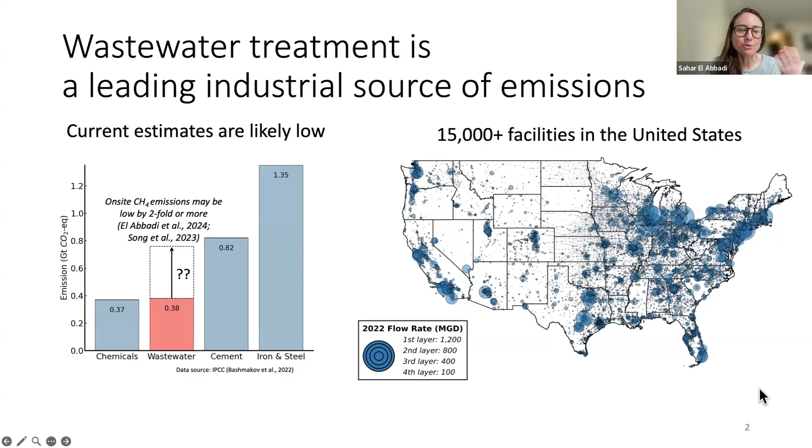There are over 15,000 wastewater treatment plants across the United States, and they really range in size and treatment method. In this map, the size of the dot represents the flow rate, and there's a wide range in terms of how much waste they're treating. It's said within the wastewater industry that really, each wastewater treatment plant is unique. You have no two facilities that are the same.

To underscore this point, I want to highlight a few plants. I decided to focus on California plants here, just to give you a sense of the different types of facilities we can see. This is San Francisco's Oceanside plant, which treats about 20% of San Francisco's wastewater.

It's designed to typically treat 15 million gallons per day, but that can increase dramatically to 175 million gallons per day for storm events, because San Francisco has a combined sewer system. So it's really affected when there are heavy rain events.

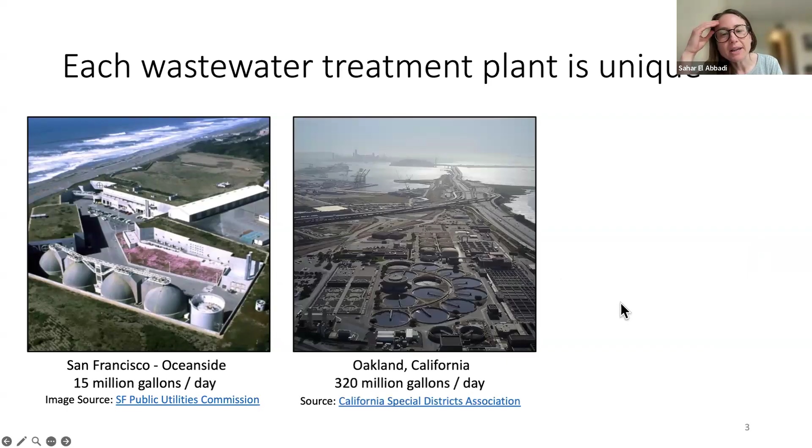Also in the Bay Area, this is East Bay MUD's facility in Oakland, California. This is one of the largest wastewater treatment plants in the United States. It treats 320 million gallons per day.

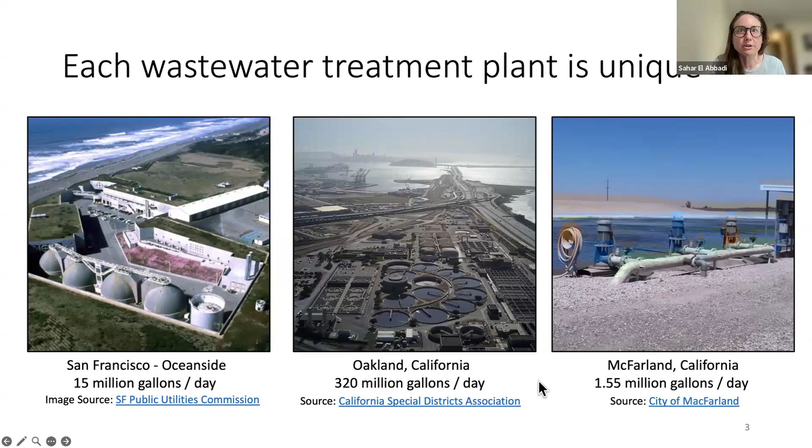These two facilities, even though they represent different treatment approaches, you can visually see the difference between them from these aerial shots. They are quite different from what is actually one of the most common by number treatment approaches in the United States, which is a treatment lagoon. Here's a small facility in McFarland, California, where the waste is added to the lagoon, and this is largely natural processes that are used for treatment - very different from these bigger industrial urban facilities.

So mitigating emissions from wastewater treatment is a challenge, in addition to the variability you see across the different facilities. There are a couple other factors to consider: wastewater treatment produces multiple greenhouse gases, so I'll mostly be focusing on methane today, but we also see emissions of nitrous oxide as well as carbon dioxide, which is relevant because some of that is of fossil origin.

Emissions come from both point sources as well as large areas, which poses an additional challenge. And a lot of these are biologically mediated processes, which means we see inherent variability across different treatment configurations that are designed for different biological treatment processes, and we have different microbial communities that contribute to the emissions.

But I think wastewater treatment is also a promising starting point for thinking about reducing emissions, and what we learn from wastewater treatment really can translate to other sectors.

Compared to other emission sources, for example agriculture—we had a meta talk several weeks ago about livestock emissions—in contrast, wastewater treatment really is a more highly controlled and engineered system.

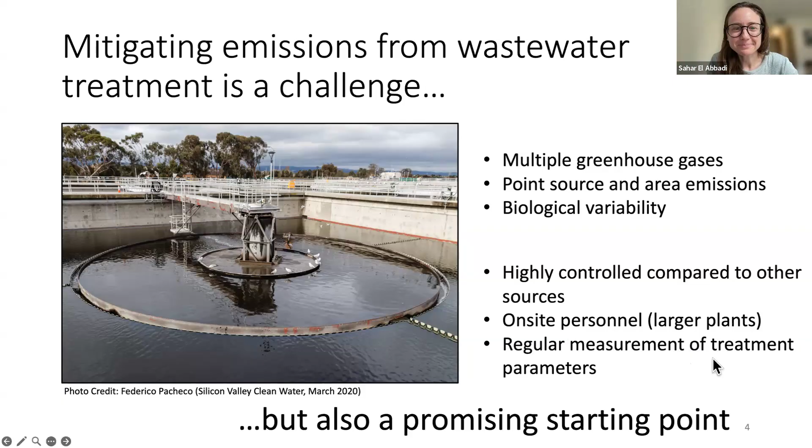For today's talk, I'll start with an overview of methane production at wastewater treatment. Then I'm going to discuss the modeling work that I've done at LBL, looking at our estimate for nationwide emissions from this sector, and end with thinking about how we can use some of the new technologies for measuring methane in the wastewater sector. That's bringing in some of the previous work I did at Stanford with controlled releases, which the meta audience may be largely familiar with—so thinking about how we can apply that to this sector.

So to begin with methane production from the wastewater treatment sector: the greenhouse gases in wastewater treatment are largely biologically produced for the most part, and we are concerned both with methane as well as with nitrous oxide.

I don't expect you to internalize all the details of this slide, but on the left half we have a simplified version of how methane is produced in wastewater treatment. We are breaking down complex organics in order to stabilize them, so that they aren't polluting our water bodies where we discharge the waste. This process involves first breaking complex organics into simpler organic compounds—organic acids—and then these are in turn transformed into methane. This process is methanogenesis, and it happens when you have a lack of oxygen—these are anaerobic processes.

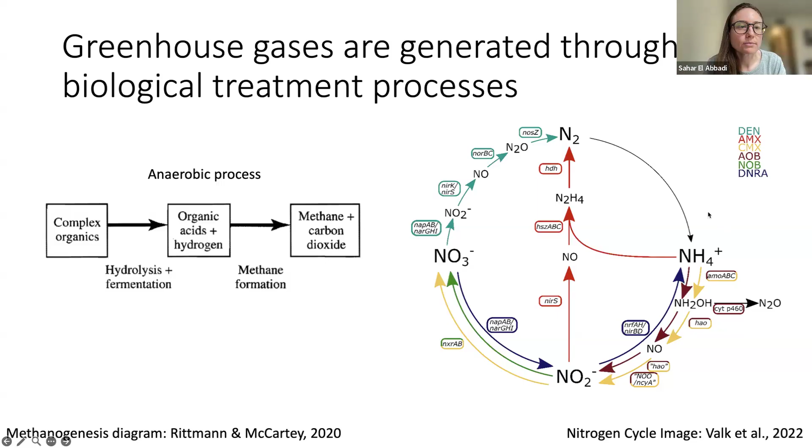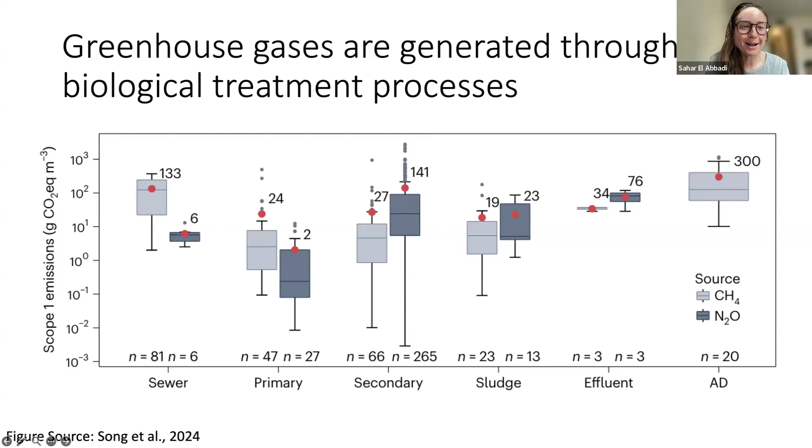So I'll walk you through in more detail what this looks like. We can see methane production from sewer systems—the lighter gray bars are methane, and the darker ones are nitrous oxide. As we're transporting waste to the treatment plant, you can have settling and solids accumulating in the pipe, and this can result in methanogenesis, producing methane, which can either diffuse upward from the sewer system, or remain in the aqueous phase and be produced in the sewer system but released at the treatment plant itself.

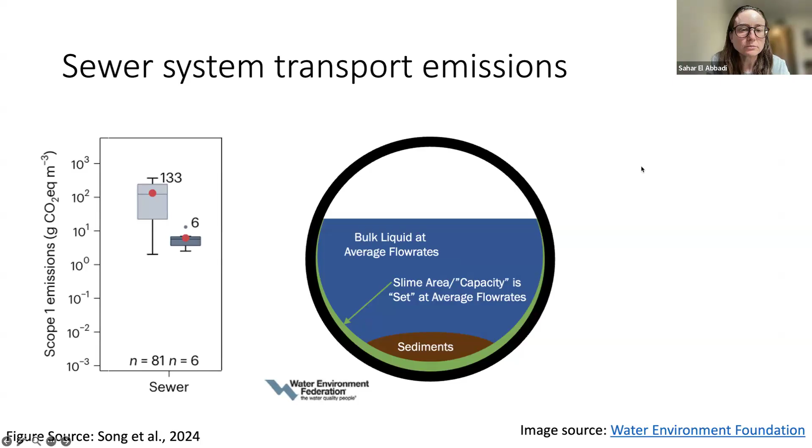The first step you'll typically see in a wastewater treatment plant is primary treatment. The goal here is to remove large solids from the water through gravity settling. This process collects solids to send to solids treatment, which can then produce methane.

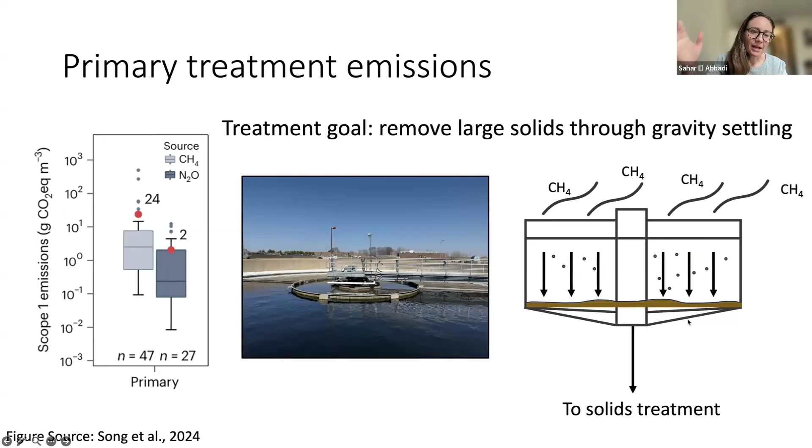Next, the liquid that has gone through primary treatment goes to secondary treatment, where the goal is to remove dissolved organics. We previously removed particles, now we're removing the aqueous phase dissolved organic compounds. This is achieved through the conventional approach of pumping air and mixing the wastewater to accelerate biological processes that would happen anyway if you discharged waste directly into a river or stream—having those same biological processes occur in a controlled environment.

This system is traditionally designed for removing organics, but can also be designed to remove nutrients, nitrogen and phosphorus, often involving a combination of both aeration and non-aeration.

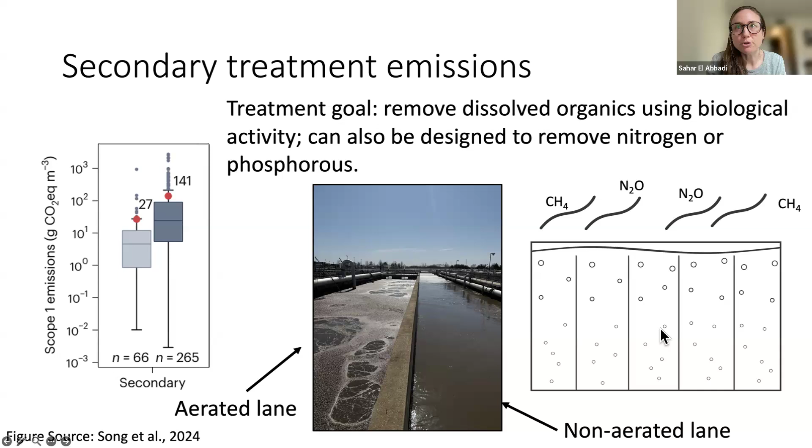After secondary treatment, the next thing to consider is solids treatment—what's happening to the solids removed both through settling and in the secondary treatment process. Here the goal is to stabilize the solids and allow them to be safely disposed of.

Many people in the methane world are very familiar with anaerobic digestion, where you see a huge amount of methane being produced. Based on our current understanding, this makes sense—we're seeing very high methane emissions from facilities with anaerobic digesters, that's the 300 grams of CO2 per meter cubed treated.

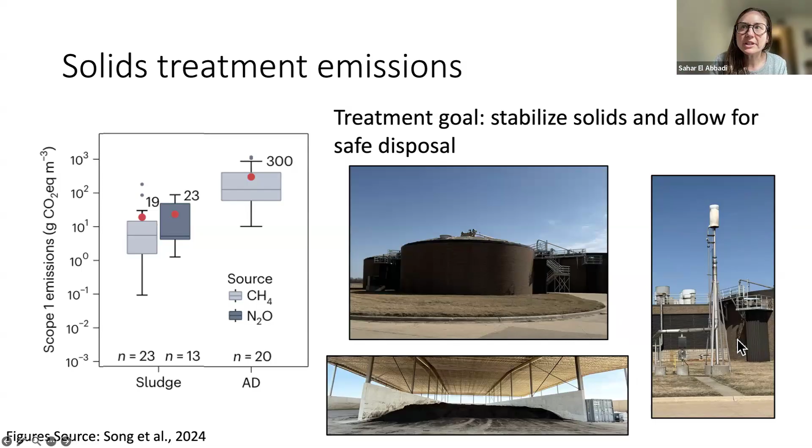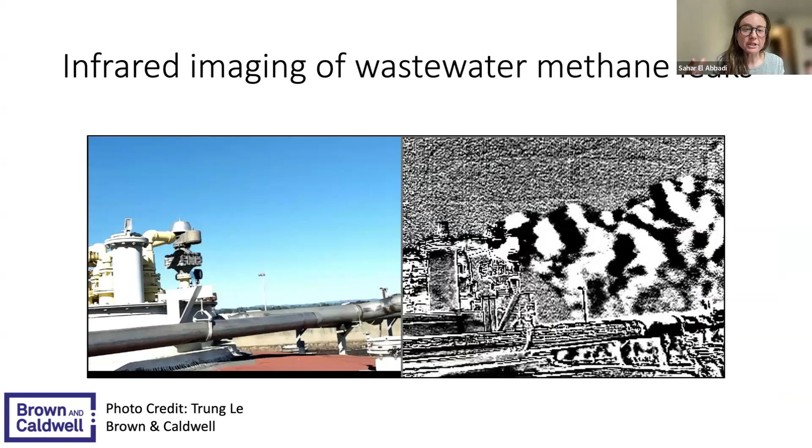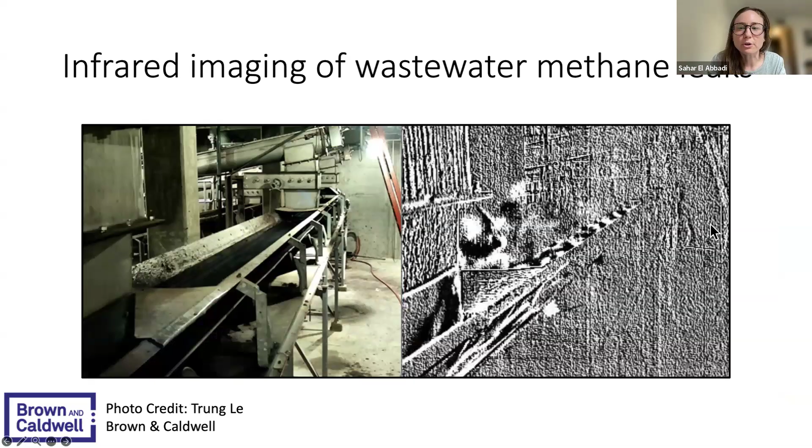So to take a step back, we have several different treatment processes throughout wastewater treatment, and we're seeing different greenhouse gases produced at different stages. But we need to consider many different aspects of this highly complex system when thinking about reducing the climate impact of wastewater treatment.

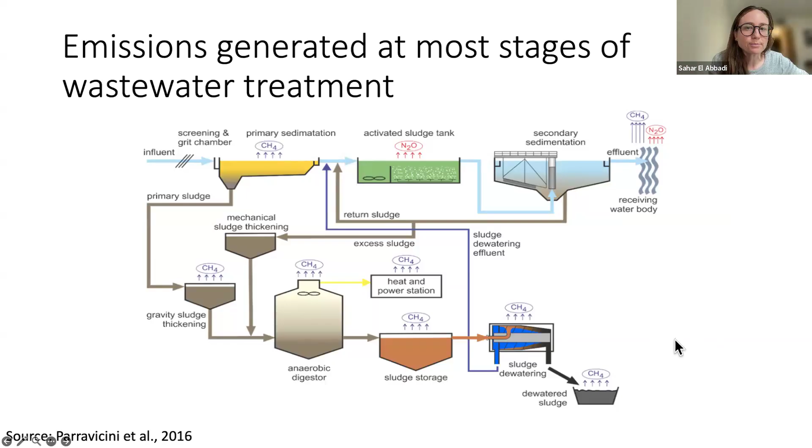With that overview, this brings me to the next main portion of my talk, where I'll discuss work I did at LBL, looking at benchmarking and creating an inventory of greenhouse gas emissions from the wastewater treatment sector. This was work I did closely with PhD student Jianan Feng, who is at University of Illinois Urbana-Champaign.

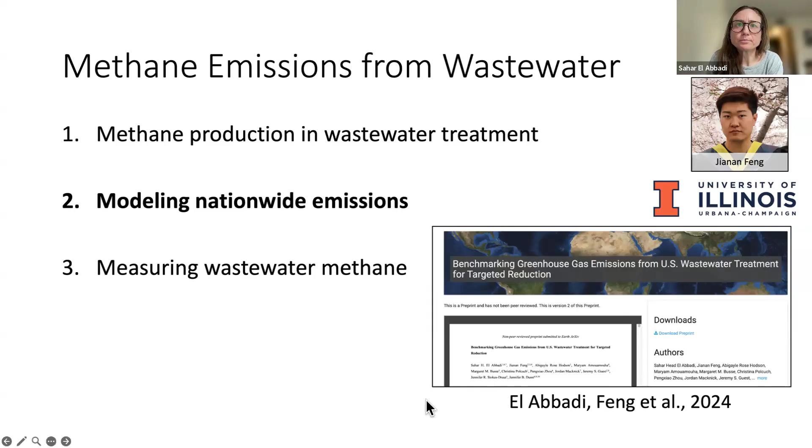So in order to answer the question, what is the climate impact of the wastewater treatment sector, we generated an inventory of all of the facilities across the United States. This is 15,876 different facilities, and for each facility we compiled and developed a model for the treatment train configuration.

What are the processes involved in treatment? How much biogas is being produced, how much solids are being produced, and how are the solids being disposed of. We calculated emissions for each facility using emissions factors specific to the treatment processes present, and we included not just emissions from on-site biological treatment, but also upstream energy and chemical consumption, as well as downstream emissions. So what are the emissions when you dispose of your solids offsite?

Those applications typically are either for agriculture, using solids as a soil amendment, or disposing of them in a landfill.

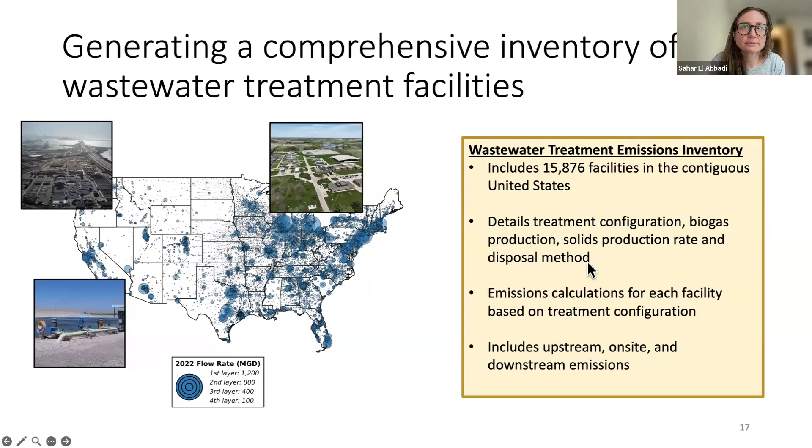If anyone is interested in working with some of these databases, happy to talk through that, because working with them and understanding them is kind of non-trivial.

So we compiled data sets on what infrastructure exists in the United States, and also used literature values to have emissions factors for different configurations, and ultimately compiled a final greenhouse gas emissions inventory.

Since I spent the first portion of this talk walking you through the different treatment processes, I'll go into a little more detail on how we assigned treatment configurations for each of the 15,000 facilities in our database.

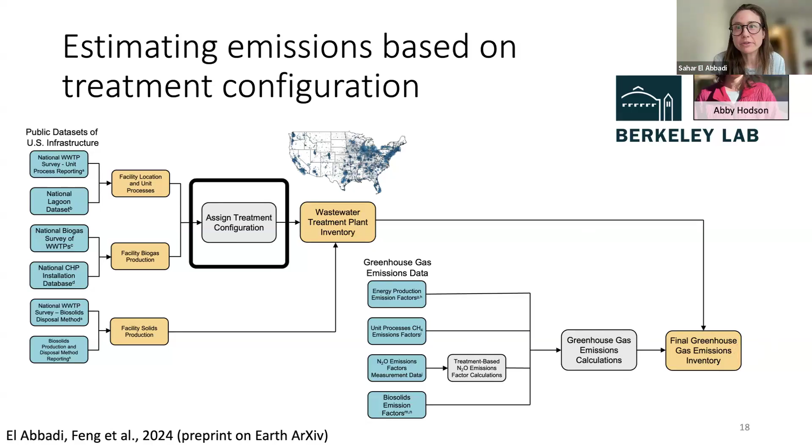In terms of liquid treatment, we could have the primary clarifier, so do we have primary treatment, that first settling process I talked you through earlier. And then we coupled this with some sort of main biological reactor for secondary treatment. For those of you more into the details of wastewater treatment, we considered conventional activated sludge systems, as well as aerating with pure oxygen.

And then we considered different biosystems designed for nutrient removal, so removing nitrogen and phosphorus. We also included a trickling filter configuration, which I didn't talk about earlier, but it's basically running the wastewater through a fixed bed that has biological attached growth on the filter.

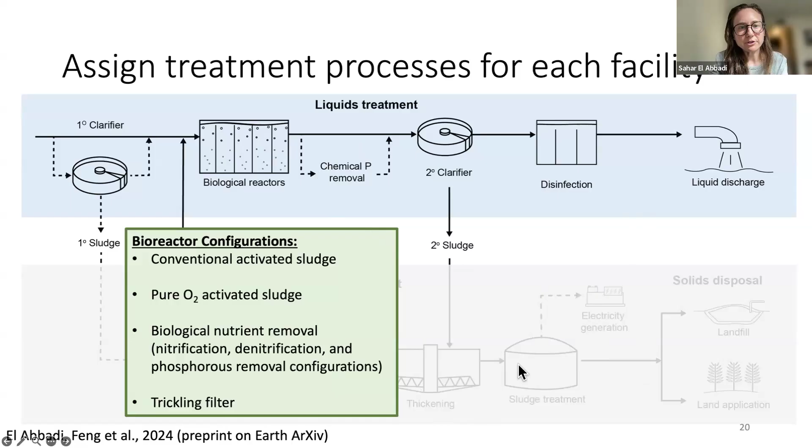We also included the option for chemical phosphorus removal, and included final stages of disinfection before discharge. So for each facility, we had different treatment objectives — the plant could have been designed to remove organics, as well as different nutrient removal configurations.

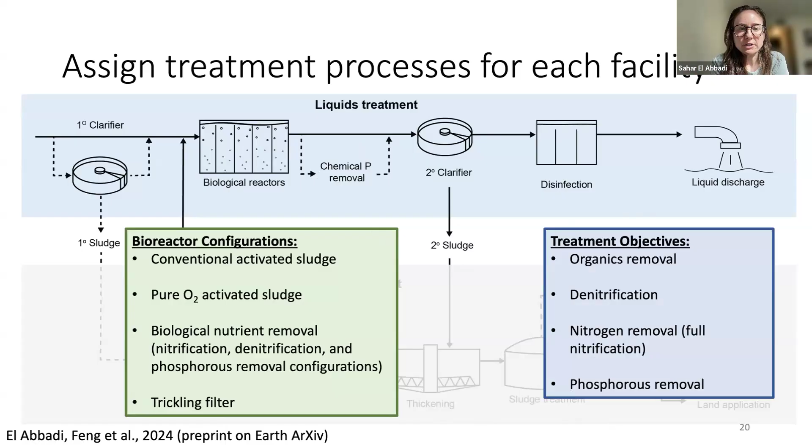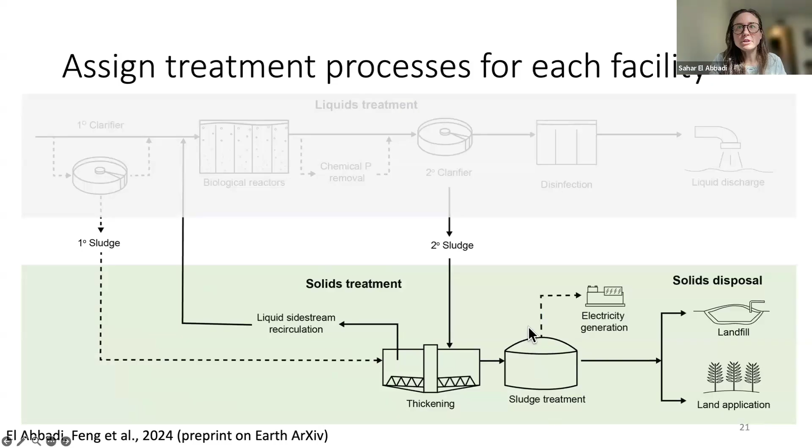On the solid side of treatment, basically the main thing we toggled was how we're stabilizing our solids. Here we considered different scenarios for anaerobic digestion as well as aerobic digestion, multiple approaches for incineration, as well as lime stabilization.

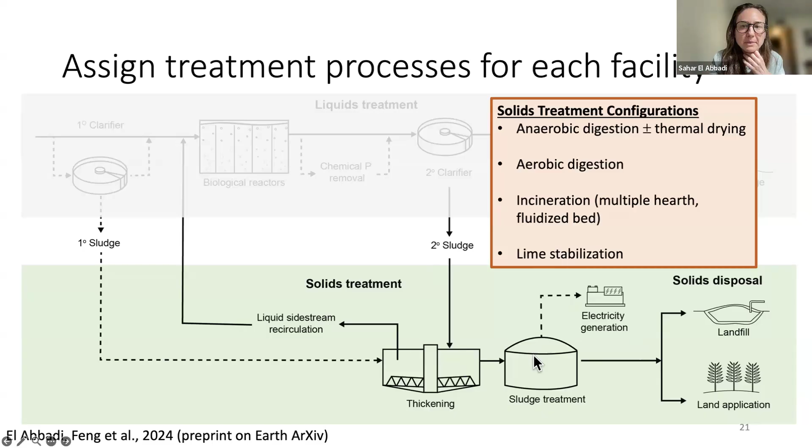Then we considered two different ways facilities could dispose of our solids — they either sent it to a landfill or applied it to agriculture. So for every one of the facilities that we had, we applied a configuration based on this schematic, and we ultimately had 49 different possible configurations.

Basic activated sludge, where we have that secondary treatment that we're pumping with air, accounts for about 30% of the facilities in the United States, treating also about 30% of the total annual flow in the US.

Interestingly, we found there were 8,000 wastewater treatment plants in the US that use lagoons as some form of treatment. On the solid side, about 30% of facilities used aerobic digestion, and a smaller number, about 20%, used anaerobic digestion. But the facilities that used anaerobic digestion treated about 64% of total flow. So we're seeing a smaller number of anaerobic digesters, but they tend to be much larger facilities, which is meaningful for our methane emissions.

Also, while about 20% of facilities in the US use anaerobic digestion, only 321 of them recover energy from the biogas they produce. So that means a lot of facilities are flaring their gas.

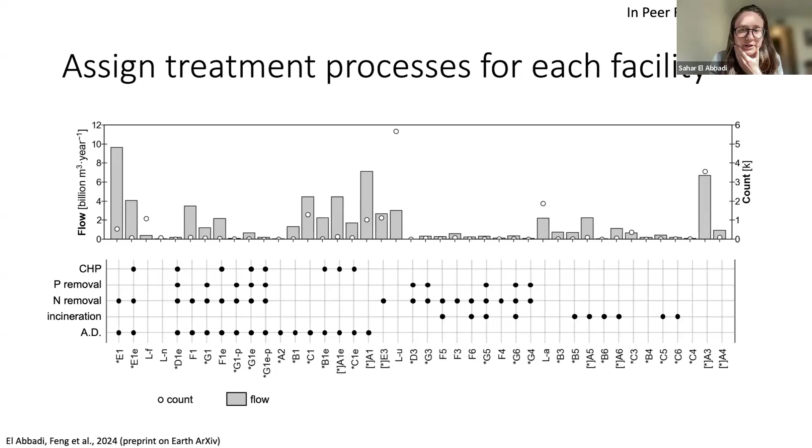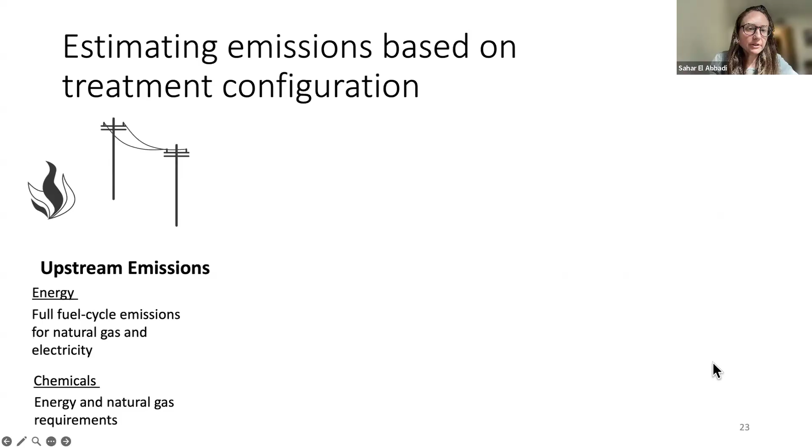In terms of estimating the total emissions from each of those configurations that we assigned to our treatment plants, we considered upstream emissions — this was the energy requirements for the plant. We applied process models for each of those configurations to get an energy estimate, and then calculated the climate impact based on the grid serving the plant, the state grid.

We considered chemical inputs. In terms of on-site production, we considered methane produced both in anaerobic digesters and from lagoons that were anaerobic or facultative, meaning a mix of anaerobic and aerobic. We included carbon dioxide, assuming a fraction of the incoming carbon to the plant is of fossil origin. We also considered nitrous oxide emissions based on the different nutrient removal configurations — whether the plant was designed to transform ammonia fully to nitrogen gas or to nitrate, or if it was not designed to remove nitrogen at all.

In terms of downstream emissions, if the biosolids were sent to a landfill, we accounted for methane produced at the landfill. And if sent to agriculture to be applied to agricultural soils, we accounted for nitrous oxide emissions from that process.

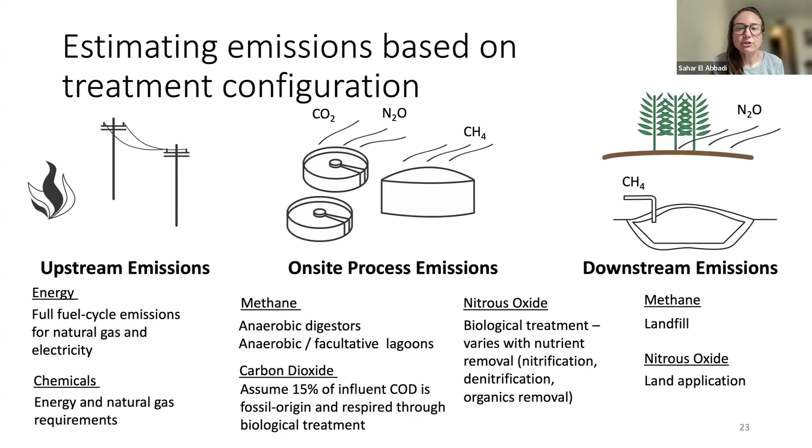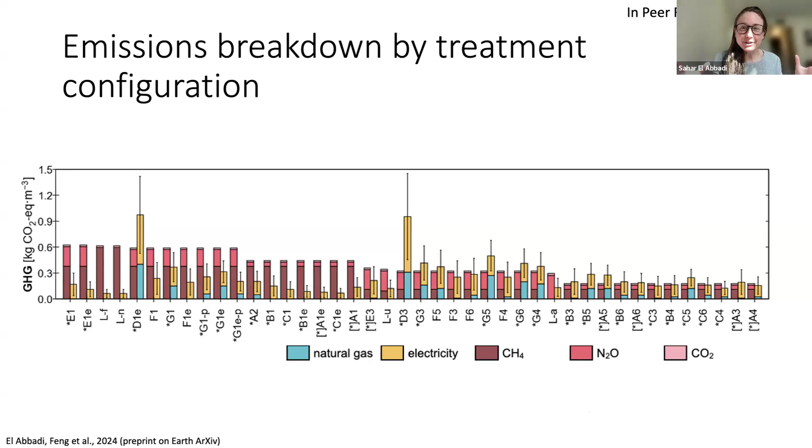Once we had the estimates for emissions from every single facility, we could calculate the nationwide impact. We found our estimate of nationwide greenhouse gas emissions is 27% higher than EPA's current estimate. There were a couple of reasons behind this: we found methane emissions were on the whole higher than EPA's estimate, and we also included electricity, which EPA did not.

Again, our on-site biological treatment processes — methane and nitrous oxide — are the main contributors to the overall nationwide climate impact of wastewater treatment. Electricity used to power the processes on the plant is also about a quarter of the total climate impact, and a smaller portion is associated with downstream emissions.

Looking at our overall facilities across the country, perhaps unsurprisingly, we found that most of the emissions are coming from the very large facilities — 80% of emissions are coming from 8% of facilities.

To look a little more closely at methane emissions — again that was about 45% of the climate impact of wastewater treatment, so really an important contributor. 85% of that methane was emitted from facilities with anaerobic digesters. We accounted for the methane produced at facilities without anaerobic digesters too, but really anaerobic digesters are the heavy lifters here in terms of contributing to methane leaks.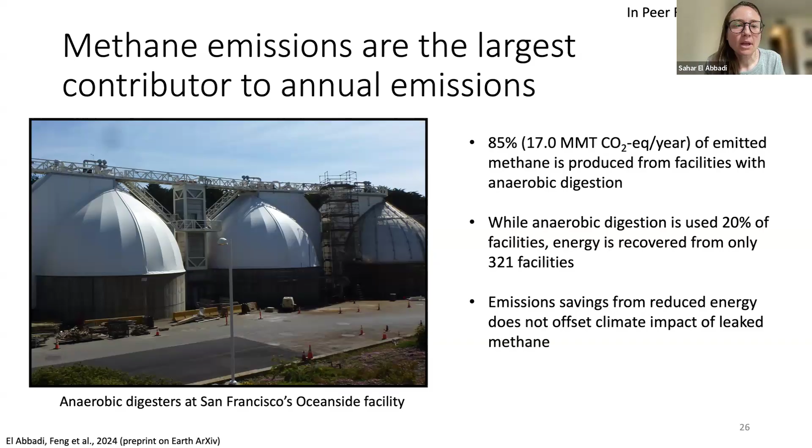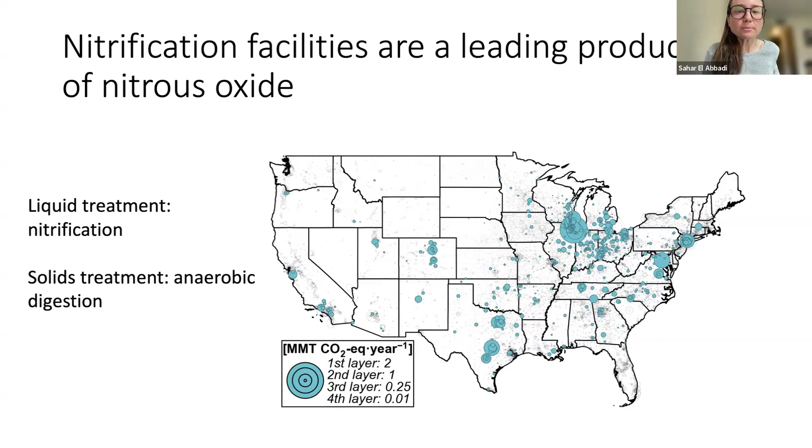Our most climate intensive treatment configuration was when we had the combination of nitrifying treatment with anaerobic digestion. For our liquids treatment, we were transforming ammonia to nitrate, which resulted in a lot of nitrous oxide production, and coupling that with anaerobic digestion for methane, we're seeing the double hit from both of those greenhouse gases.

Finally, I want to emphasize that wastewater treatment lagoons were the most common treatment method across the country. As I said before, we saw about 8,000 wastewater treatment plants that use lagoons as their method of treatment, and these are incredibly understudied. We ended up having to rely on IPCC's emissions factors for lagoons, and there really isn't a lot of data currently available. So while these treat a smaller percentage of flow and don't contribute as much to emissions as larger facilities do, they tend to be less controlled environments.

You may have a facility dumping their waste into a lagoon and leaving it sitting, not properly mixed, so you could see perhaps a lot of methane being produced in that way. I think this is really an area not to be overlooked, but it also underscores the broader point that we're limited in this analysis by the availability of measurements.

We really need measurement data that reflects the broad configuration of wastewater treatment plants we have, both in terms of variability in geography, treatment process, and size. So I think we really need to consider how we can improve measurements, both to have better estimates of nationwide emissions, but also to find and fix leaks and reduce emissions overall.

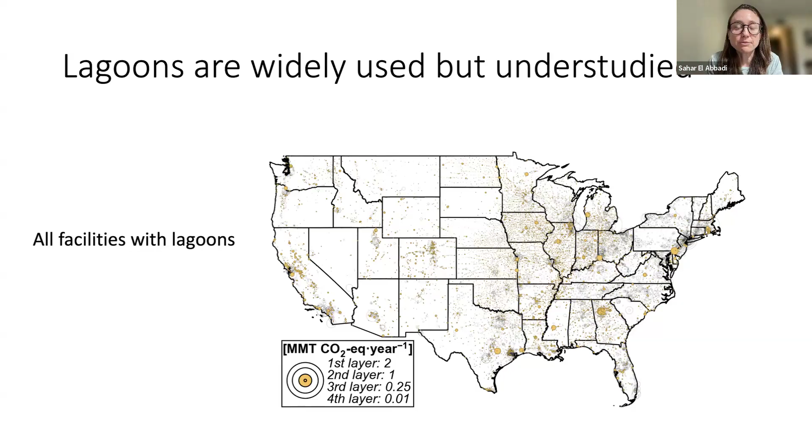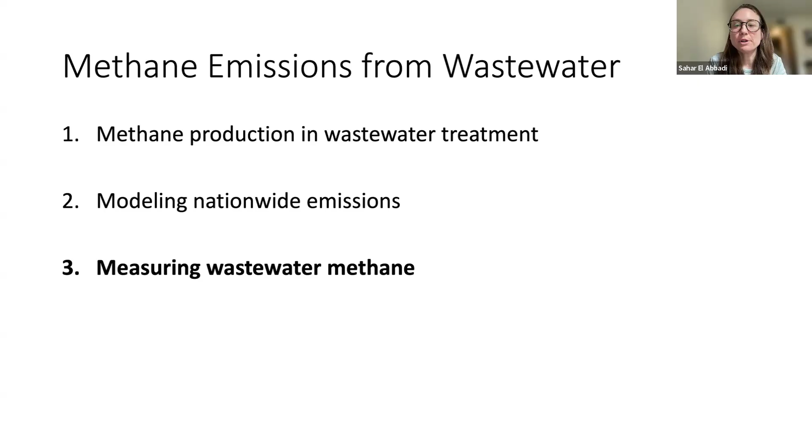This brings me to thinking about how we might want to apply some of the new measurement technologies that are now being used increasingly in the oil and gas space. How relevant are these to the wastewater treatment sector?

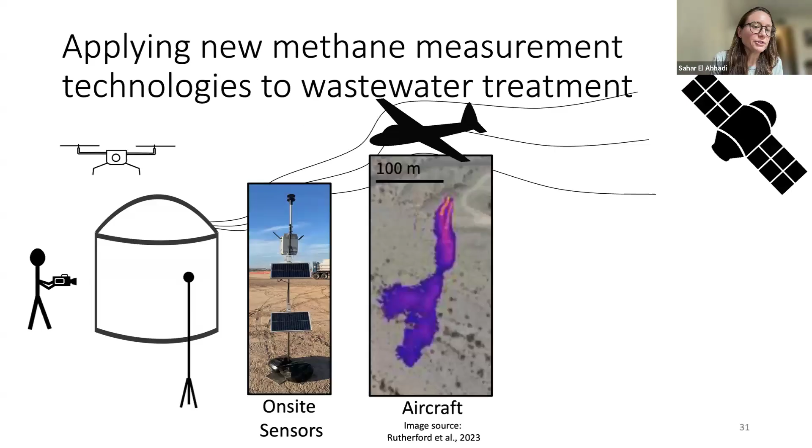This maybe is a bit more familiar territory for a lot of the meta audience, and we're coming back to the work that I did at Stanford. We can think about how we might deploy different new technologies, such as on-site ground sensors, or conducting aerial surveys and satellites, in order to better understand emissions from wastewater treatment.

I think all the advantages you see in the oil and gas sector that these technologies provide really do translate to wastewater treatment, as they would allow us to have a better snapshot of how emissions vary both across facilities, if you conduct an aerial survey of a large geographic area, or if we can have a better understanding of how emissions are changing over time.

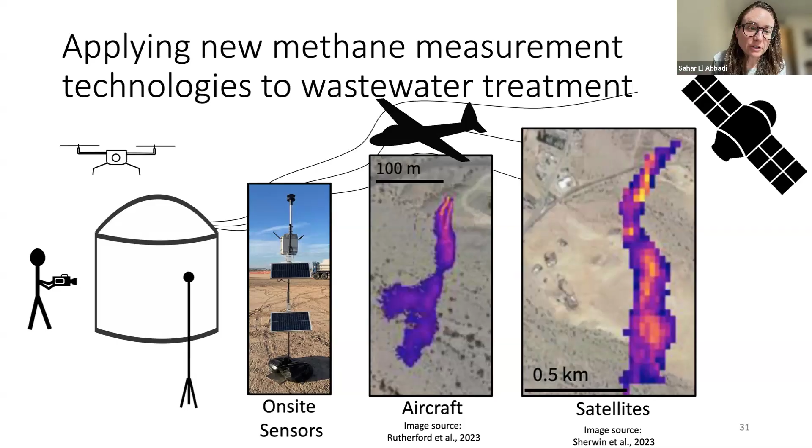Flashback to remember our Stanford controlled release tests, for regular meta attendees. This is something I think you've seen many times before. Richard, Evan, and I have all presented our work conducting independent validation of airplanes, satellites, and ground sensors. But for those less familiar, just a brief highlight in terms of the quantification capabilities of these technologies.

Satellites aren't going to be able to see methane emissions through the atmospheric column the way airplanes can, so they won't see as small emissions. But on the whole, we're seeing strong trends in the right direction, with accurate measurements in aggregate across satellites. The work Richard and I did evaluating ground sensors is an area where we really need growth in terms of performance and R&D to improve quantification, since currently we're seeing strong underestimates.

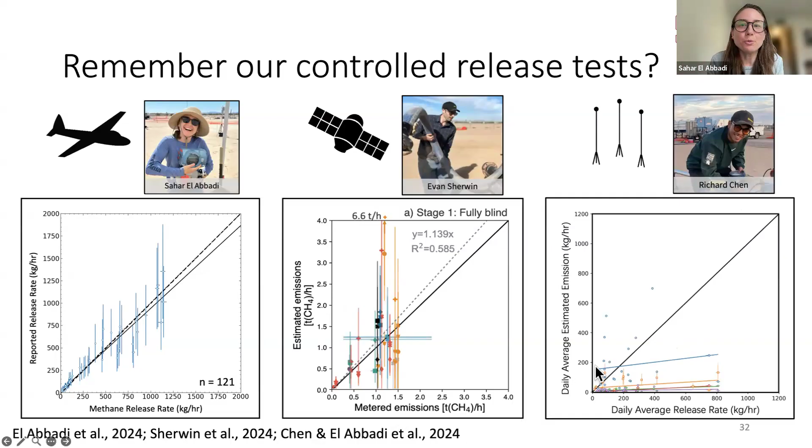So will these technologies be able to see emissions from wastewater treatment? This is work from Carbon Mapper, where they took images collected with their aircraft platform and attempted to predict if their satellite would be able to see emissions. In this paper by Ayasse et al. 2019, their airplane was able to see emissions from a wastewater treatment plant, actually a treatment plant in San Jose. They also saw emissions from manure lagoons and dairy digesters, which were larger - about twice the size of the wastewater treatment plant leak they saw.

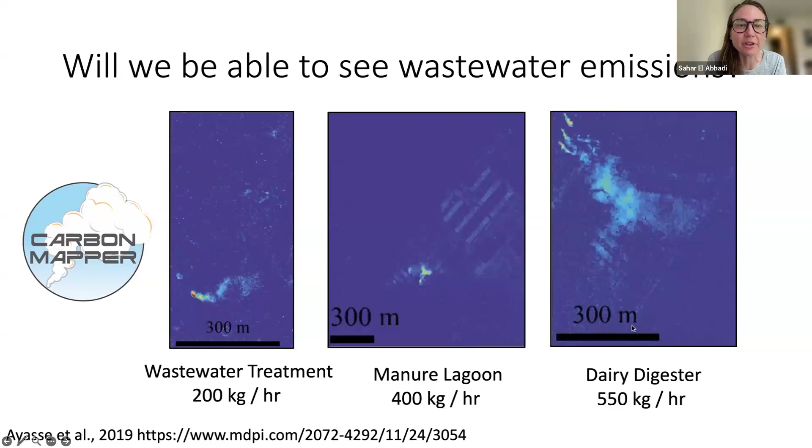While these are from the agricultural sector, lagoons and dairy digesters are the same technologies we're going to see at wastewater treatment plants. So we are seeing emissions using these existing platforms from wastewater treatment or similar systems. I've actually been to workshops where we looked through the Carbon Mapper platform and were able to find, for a specific wastewater treatment plant, the leaks coming from it, which was quite cool.

Depending on the instrument, whether airplane or satellite, we may be able to see moderate to large wastewater treatment plant emissions. It would be much more challenging with satellites, but perhaps with more targeted ones. Ground sensors seem like a natural fit for the wastewater treatment sector - we're already monitoring a lot of parameters on site, and deploying sensors around equipment seems ideal, but unfortunately we're not really at the stage where these technologies are ready to be used.

The performance we found for ground sensors was on a really clean background, and wastewater treatment is a much more complicated environment where there's going to be different infrastructure and buildings that obstruct plume development, affecting how ground sensors estimate the ultimate emission size. We've done controlled release testing on this very clean background so far, and it would be really valuable to have additional technology validation that mimics wastewater treatment plant emissions.

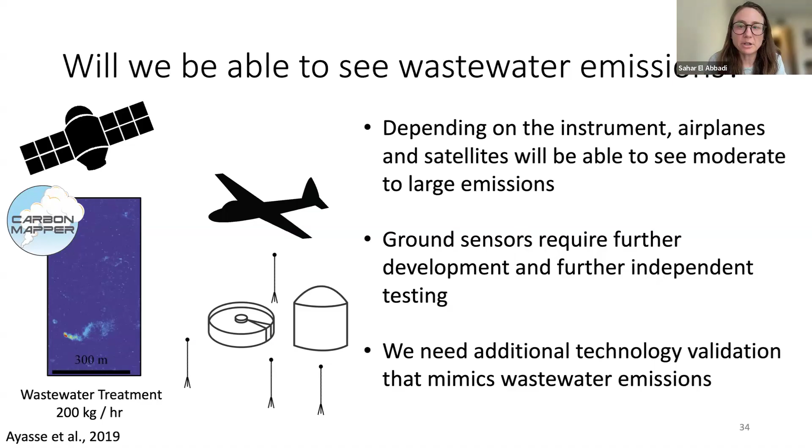There are several technical challenges to monitoring wastewater treatment plant emissions. Circling back to what I discussed at the top of the talk, we see non-point source emissions in addition to point source emissions. Up until now, technology validation has focused on single point source emissions, representative of a flare or perhaps a leak at the top of a digester. But we really want to see how these technologies perform across a range of different emissions conditions we see in wastewater treatment. Emissions can also be lower concentration, which poses a challenge to measurement.

On-site infrastructure can obstruct plume development and transport, particularly a challenge for ground-based measurement technologies - ground sensors and vehicle measurements. Perhaps this isn't the same challenge as with offshore emissions in oil and gas, but for imaging technologies there's the challenge of measuring methane over water. If you're considering a very large lagoon for treatment, that could pose an additional challenge.

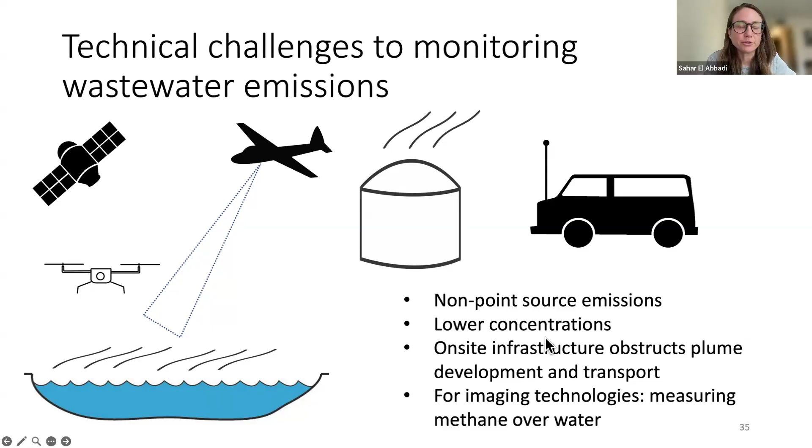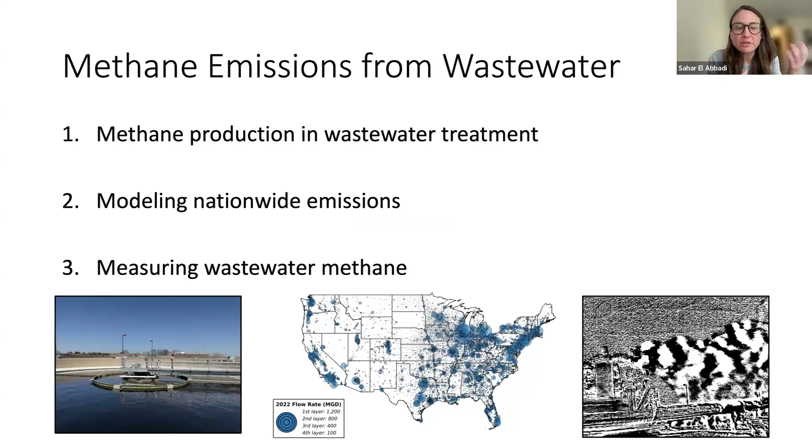This brings me to the end of my talk. As a recap, today we went over methane production from wastewater treatment. I discussed the work I've done at LBL modeling nationwide emissions from this sector, and lastly, ended by thinking about how we can bring measurement lessons we're learning in the oil and gas space over to the wastewater treatment sector.